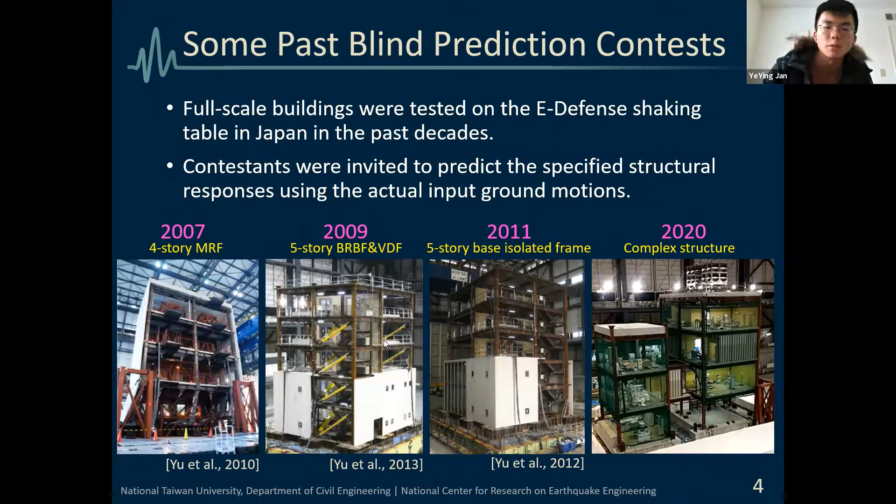The team from NCREE and NTU has participated in the contest several times. In 2007, we got first place in the 3D category using OpenSees, and second place in the 2D category using PISA3D. PISA3D is the Platform of Inelastic Structural Analysis for 3D systems, which is developed by NTU and NCREE. In 2009 and 2011, we also got great results using OpenSees and PISA3D. Then last year, we got first place in structure response using OpenSees.

Let me first introduce our team members, but Professor Tsai has introduced them already. I'm Ye-Ying Jan, a graduate research assistant, and Dr. Keh-Chyuan Tsai, professor in NTU, Mingjie Zhuang, researcher in NCREE, and Dr. Ruiliang Lin, research fellow in NCREE.

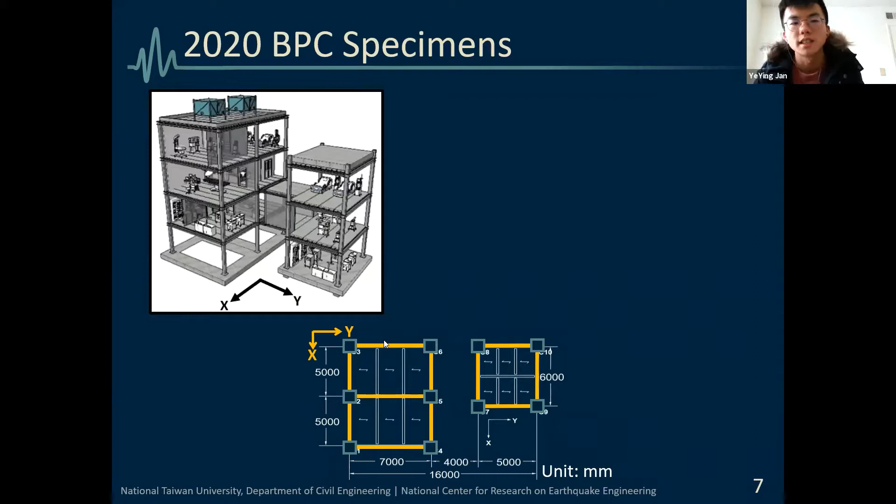Okay, let's see the specimen in the 2020 BPC. The specimen consists of two buildings. One is the fixed base building, and the other one is the base isolated building. Below is the floor plan of the specimen. The XY direction is defined like this, not like the normal one, and is defined according to the contest regulation.

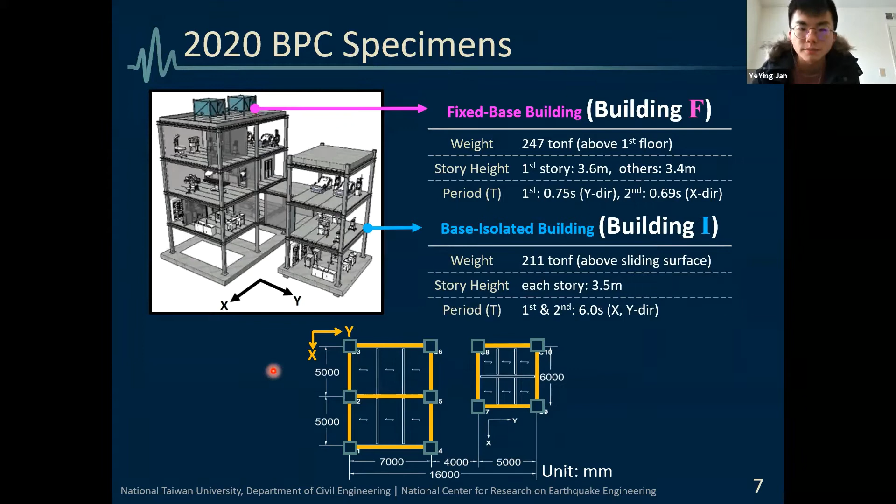Okay, there are three categories in the contest. One is the structural response prediction. There are 5 items for the fixed base building, including floor acceleration, story drift, beam end rotation, column base rotation, and the relative displacement of the expansion joint. And 2 items in the isolated building: one is floor acceleration, and the other is displacement of the isolator.

The other category is non-structural response, including piping, tank, and the light. And the third category is still non-structural response, but using the structural response after the experiment. In these 3 categories, we participate in the structural response, which has the most teams competing.

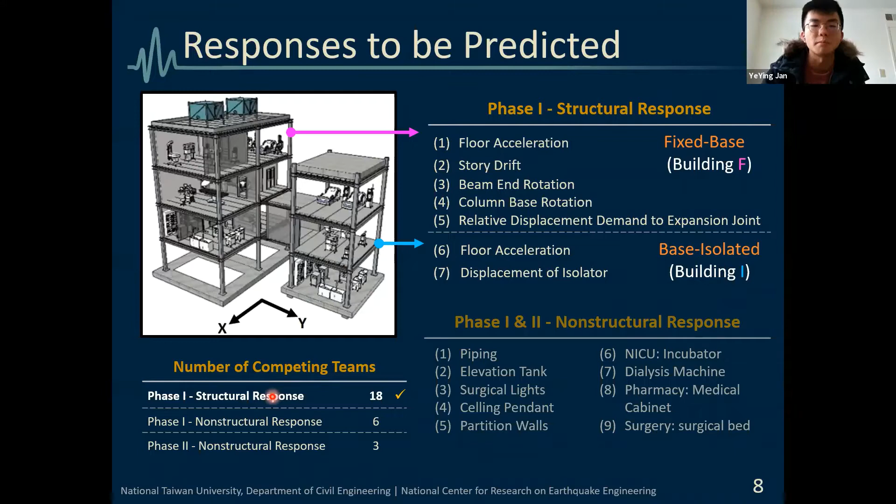In the score counting, there are two parts. One is submission score, and the other is accuracy score. Below is the table of our score, and we got 21 submission score and 20 accuracy score, and got first place in 18 teams.

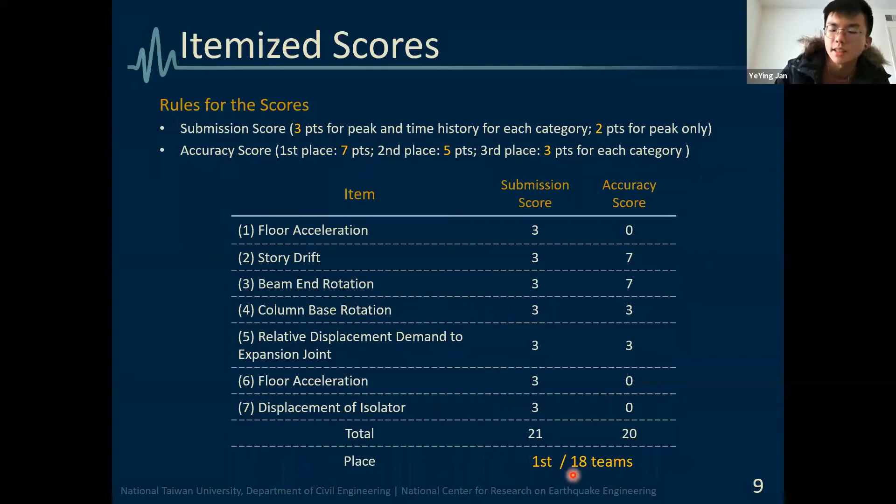Okay, let's see the numerical modeling. This is a summary of numerical modeling. My software for analyzing the model is OpenSees, and the GUI for building the model is GiD plus OpenSees. In the numerical procedure, I adopt Newmark integration with gamma 0.5 and beta 0.25. And P-delta is adopted for geometric transformation. And Newton line search is used for the solver algorithm.

And the integration time step size is 0.005 seconds. And 1% damping is applied for the first and the sixth mode of the fixed base building in computing Rayleigh damping. Then in the numerical model, rigid floor diaphragm is assumed for all floors. And the total dead load for each floor provided by the organizer is adopted. And masses are placed at the column center lines considering the tributary area of the columns. And all line elements in the numerical model are force-based beam-column with 3 integration points.

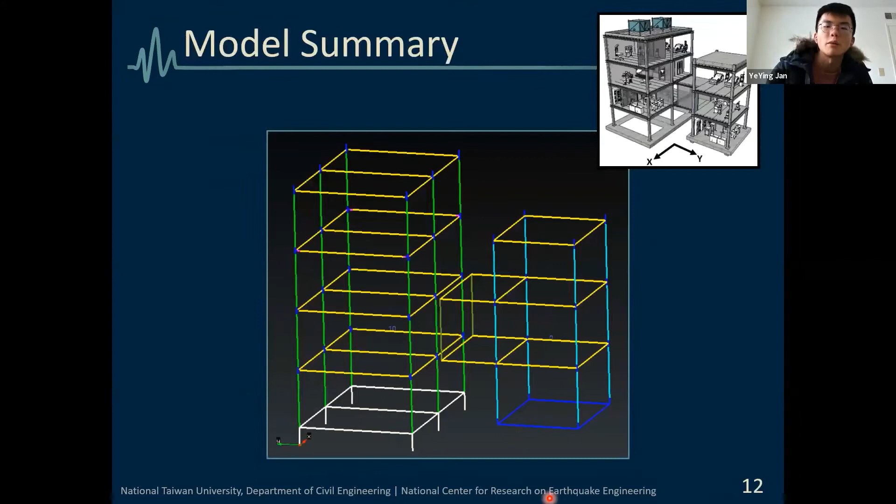Okay. This is the schematic of the numerical model. You can see the blue line in the corner of beam and column. These are the rigid bars to simulate the panel zone. And the pink line in the third floor of the fixed base building is to simulate the exterior diaphragm, which cannot be seen clearly. And the gray lines are the grade beams with elastic section. And the joint between the column and the gray line is the zero length element to simulate the ductile column base, which is special in this contest.

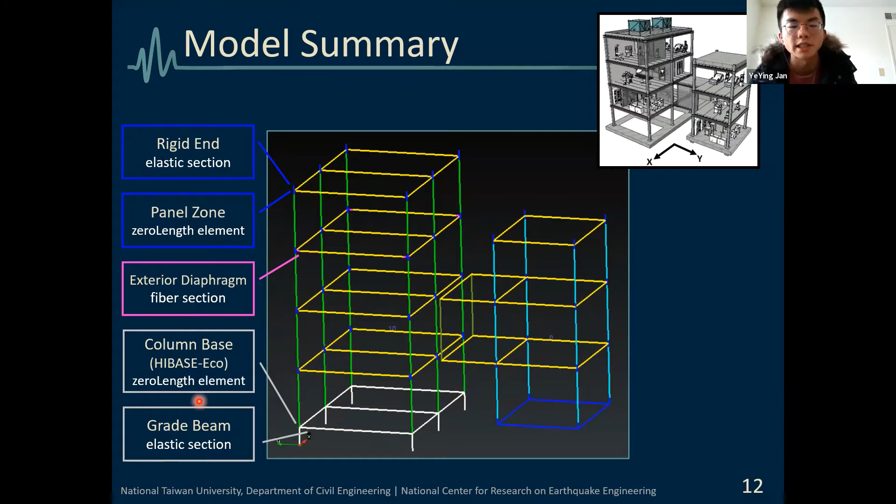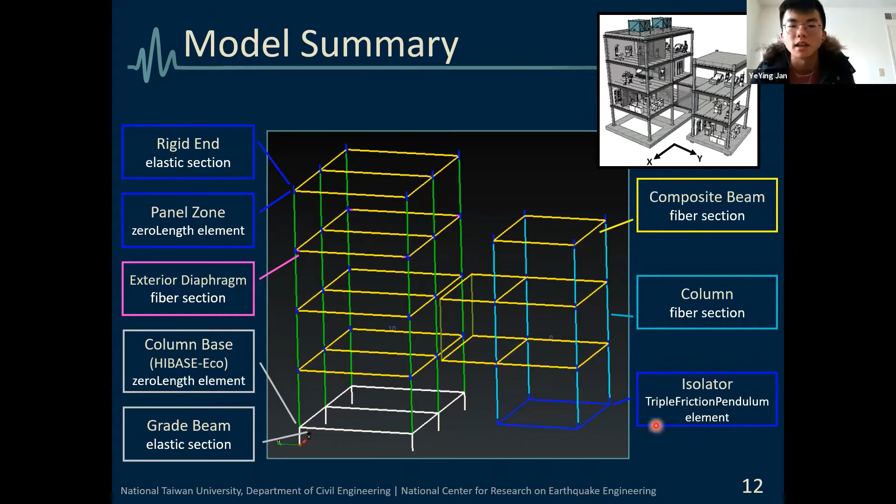Then the yellow line is the composite beam, which uses the fiber section. And the columns also use fiber section. The last is the isolator. I use triple friction pendulum to simulate the isolated building. Okay.

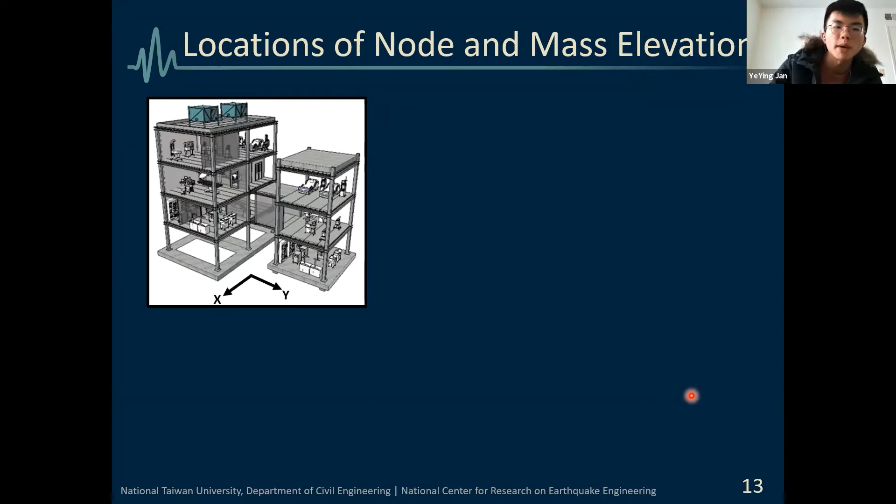This page shows some locations of nodes to notice and the mass elevation in the numerical model. The mass is placed 50 millimeters above the top of the beam as the average height by weight of the concrete floor and the weight of the steel structure. And the column nodes at the top of the beams, the bottom of the beams, and at the column base are to simulate the panel zone.

And at the bottom of the isolator, one node is fixed at 0 millimeters height at the shaking table, and 330 millimeters height and plus 157 height are the lower nodes and the upper nodes of the isolator.

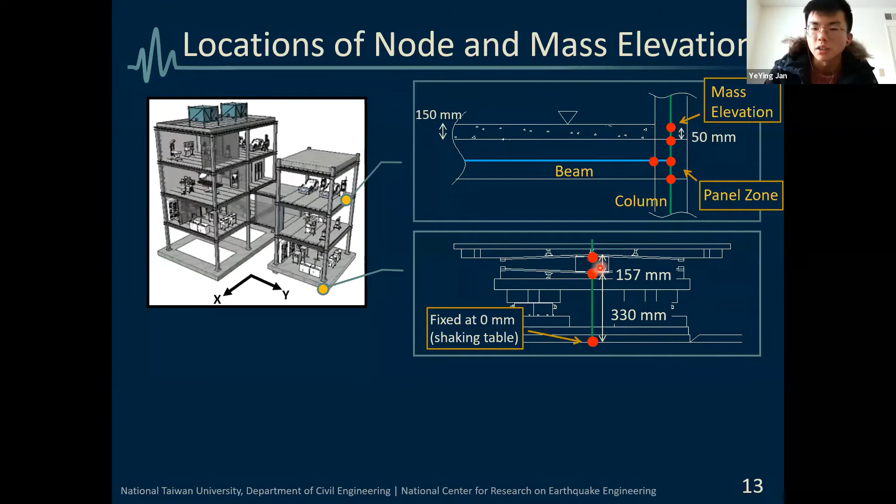Then in the second floor of the fixed base building, the contest organizer placed 2 LVDTs to measure the rotation of the beam. So I also placed a node 1,500 millimeters away from the column base to measure the rotation of the beams. I use the rotation in node I here minus the rotation in node J here to get the rotation of these beams.

Finally, in the column base of the fixed base building, there are nodes at 0 millimeters high, fixed at the shaking table, and at 1,050 millimeters high at the column base, which is 50 millimeters above the first floor because of the cement of the ductile column base. And between these 2 nodes, one node is put in the middle to connect the grade beams.

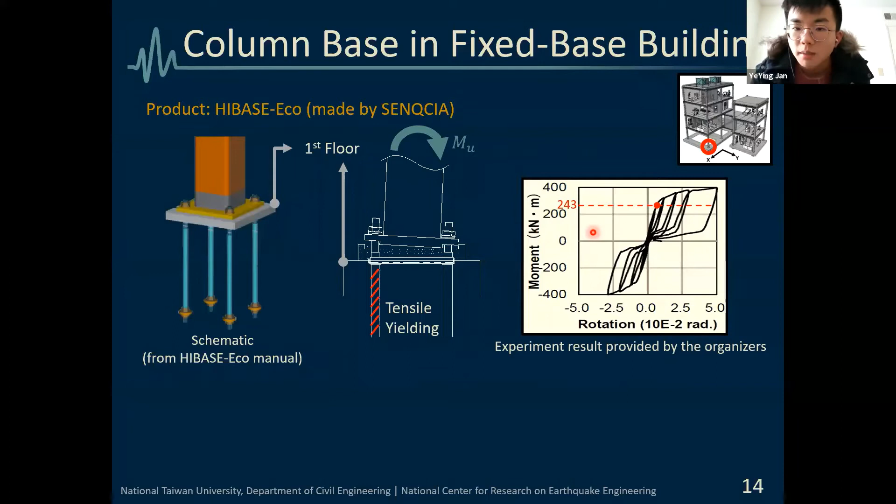Okay, let's see the column base in the fixed base building. This is the HIBASE-Eco made by a company in Japan. When sustaining bending, this ductile column base is designed to make the bolt yield prior to the column base. So the moment rotation diagram of the column base is like this, provided by the organizer. The loading and unloading history will be like this. The bolt will yield prior to the column base.

Then let's see the numerical model. I use a zero length element in the numerical model, and in the Rx and Ry degrees of freedom of the zero length element, I use self-centering material to simulate the ductile behavior. One node, I, is connected to the grade beam, and the other node, J, is connected to the column. Between these two nodes, the zero length element is adopted, and the Rx, Ry, two horizontal rotation degrees of freedom use the self-centering material.

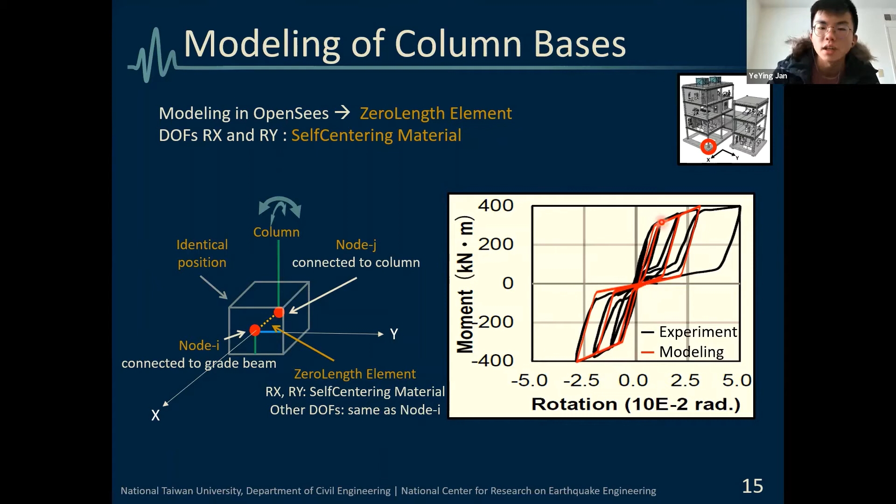Then the simulated results are like this, the red line. These are matched to a certain degree to the experiment data.

Then let's see the panel zone. When the panel zone is sustaining bending moment, the shear deformation occurs like this. So to model the behavior of the panel zone, the nodes are placed at the four edges of the panel zone. Within these nodes, rigid bars are connected within the panel zone.

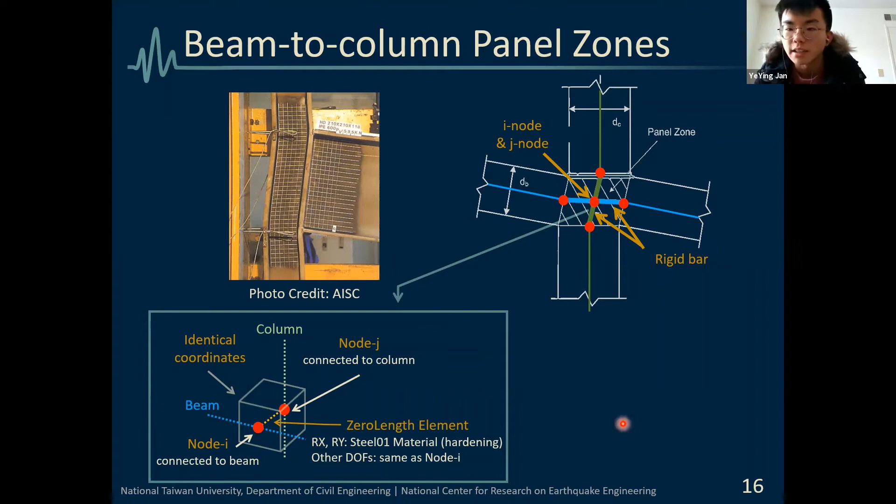And in the center of the panel zone, there are two nodes. Here is the schematic, node I and node J. Node I is connected to the beams, and node J is connected to the column. Between node I and node J, there is a zero length element. And in the Rx and Ry degrees of freedom, Steel01 material with hardening is used to simulate the rotational stiffness and the deformation of the panel zone. And the other 4 degrees of freedom are tied together.

The rotational stiffness of the panel zone and the yielding capacity can be calculated by these formulas in Tsai and Popov, 1990.

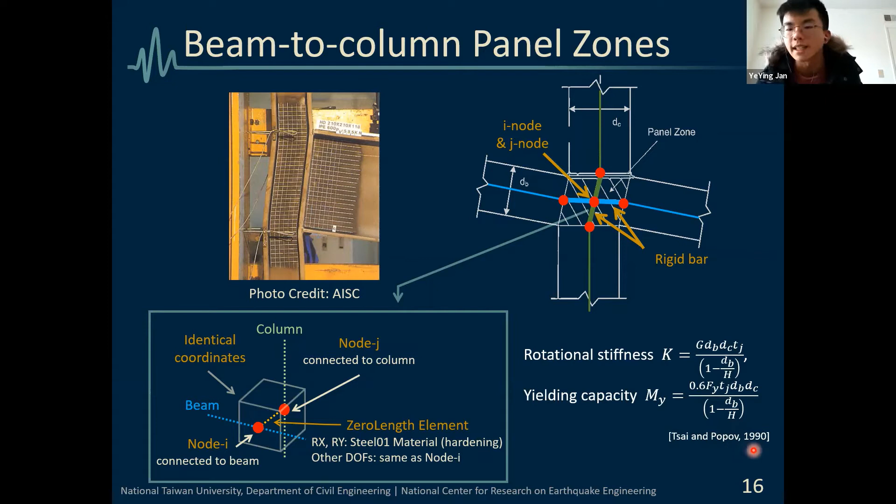Okay, the final part in the numerical modeling is the double concave friction pendulum system. According to the manufacturer, Nippon Steel Engineering, the isolator has 0.013 friction coefficient, the radius of sliding curvature is 4.5 meters, and the period is 6 seconds.

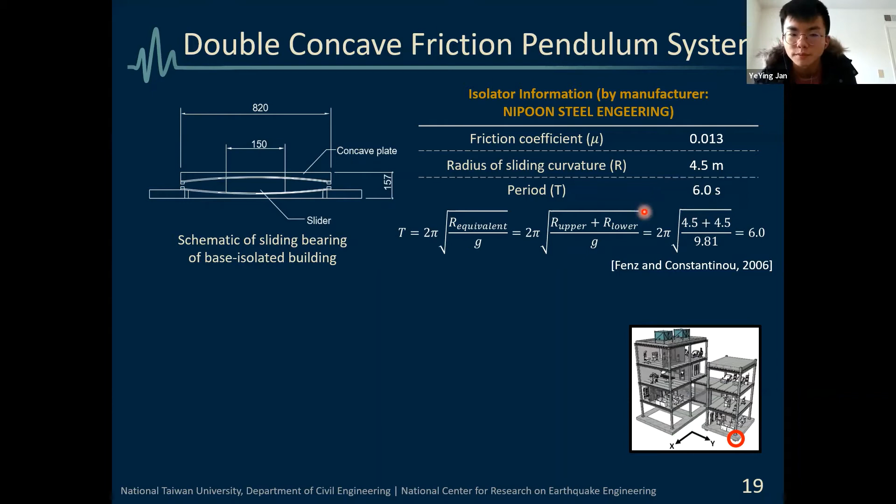Then in OpenSees, there is no certain element for the double concave isolator, so I use triple friction pendulum to simulate. To catch the behavior of the double concave pendulum, the friction of the inner sliding surface, the red line here, is set big enough to prevent the slider from sliding. So I use the Coulomb friction model and set the friction coefficient of the inner sliding surface as 1.0. It is big enough to prevent sliding.

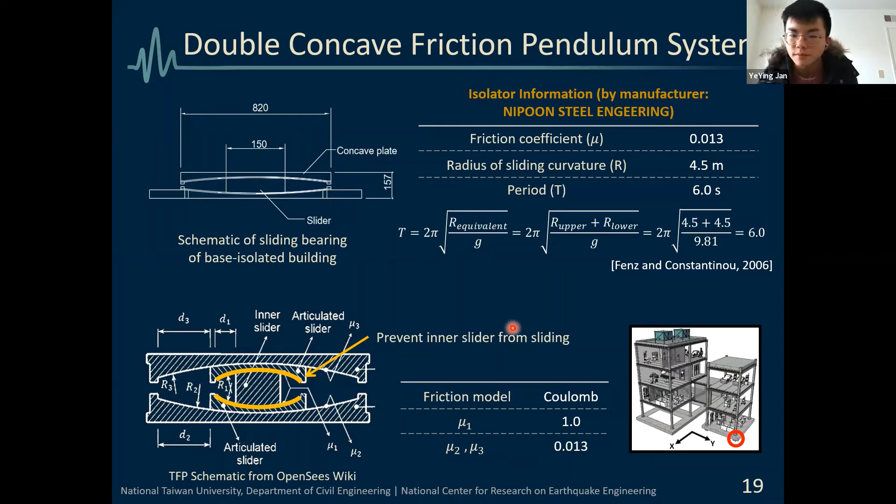And the outer sliding surface is 0.013, as per the manufacturer information. Okay. Let's see the analysis result. The first is modal analysis.

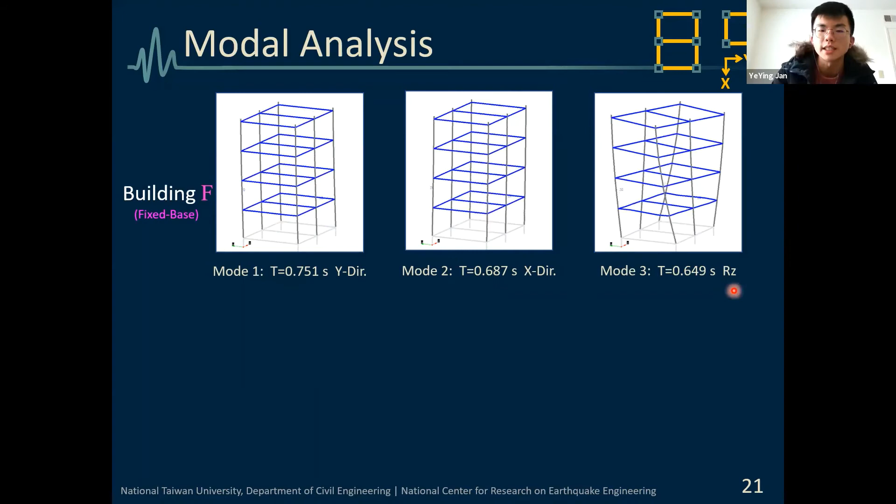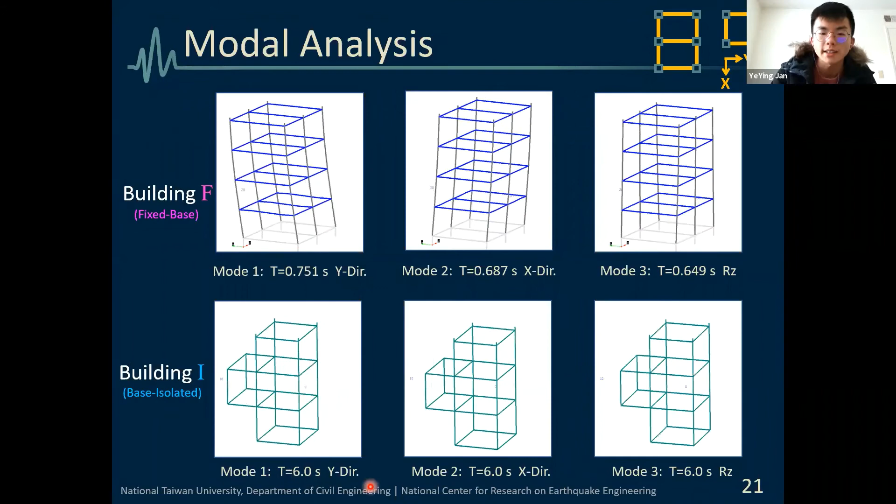The first three modes of building F, the fixed base building, are like this. In y direction, 0.75. In x direction, 0.68. And in rotation z, 0.649. And the first three modes of building I, base isolated, are like this. The first three modes are all 6 seconds in x, y, and rotation z.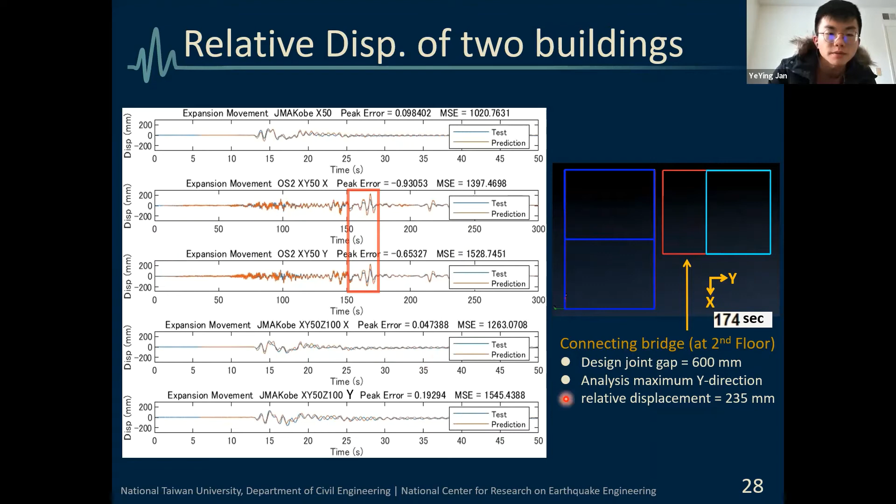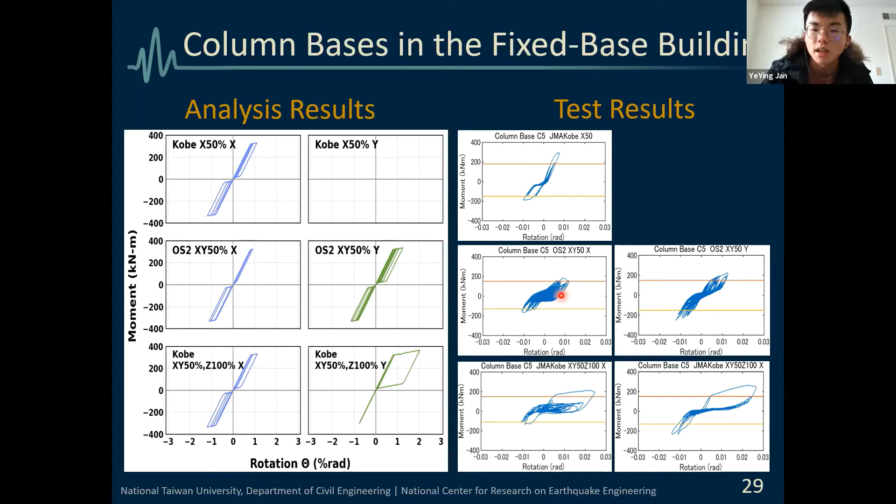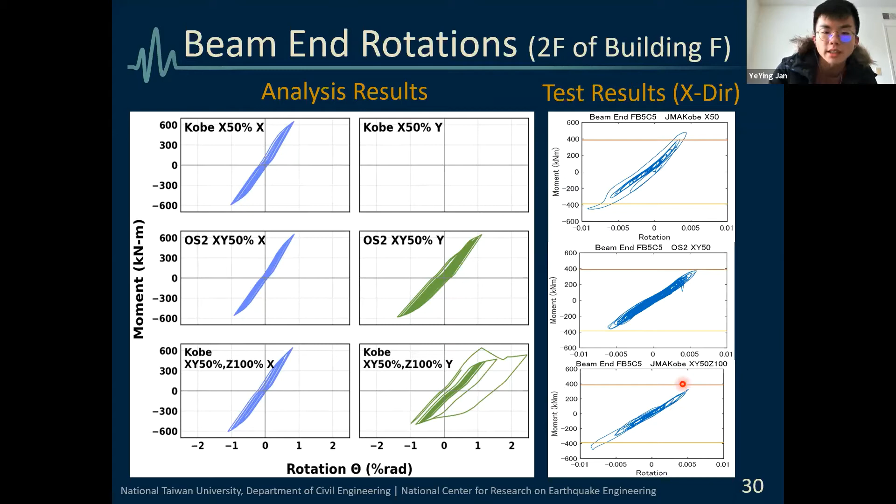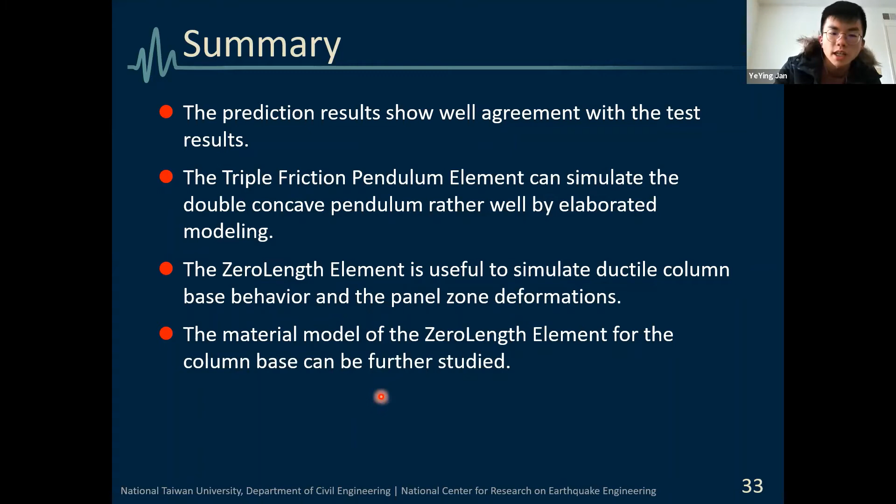And this is all referenced in this PowerPoint. And the OpenSees program developed by Dr. Frank McKenna and other researchers at PEER Center and UC Berkeley is very much appreciated. Part of the present research is supported by the Tokyo Metropolitan Resilience Project of the National Research Institute for Earth Science and Disaster Resilience. The organizers are gratefully appreciated for organizing the blind prediction contest, conducting the test and sharing the test result. And this study is supported by the Ministry of Science and Technology, Taiwan ROC.

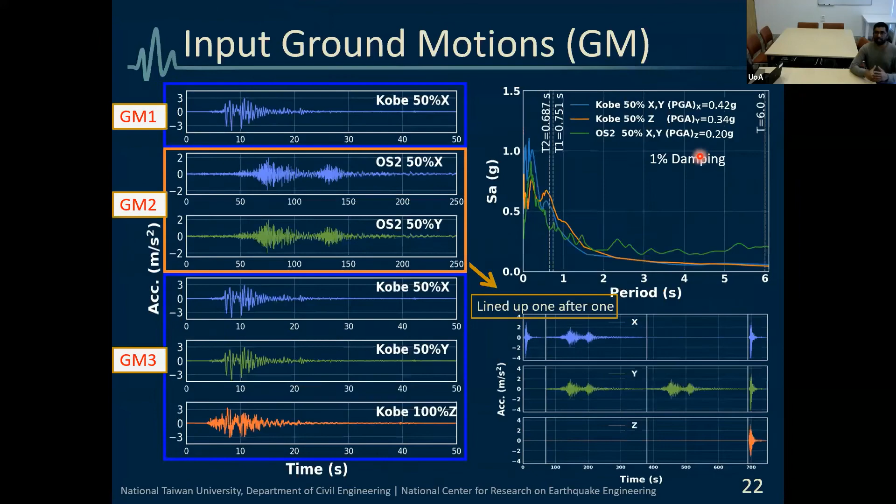So thank you for your presentation and your modeling, and I hope it will help everyone on how to model the finite element connections well. Any questions from anyone in the audience? Please feel free to ask any questions. I mean, I can ask a couple of questions in the meantime.

So one thing is, in your acceleration response spectrum, you use 1% damping. Is there a reason for that? Yes. I don't remember the slide number, sorry. That's no problem. Yes, because we consider the first to sixth modes of the fixed building important in our analysis. And 2% may be too big for the damping, so we use 1% in our numerical model. So we apply 1% damping in the spectrum analysis, same as the 1% damping in our numerical model.

No, my question was, how did you come up with 1%? Because I didn't understand your answer, sorry. Usually for structures, the code recommends like 3%, 4%, 5%, depending on the structure and the connections you're using. So I was curious how you came up with 1%, because in the experiment you have a certain amount of damping, and this 1% Rayleigh damping is in addition to the hysteretic damping, because you're using a lot of elastic sections, elastic members also. So I was thinking 1% was a little low because you're replacing a lot of rigid connections and elastic sections.

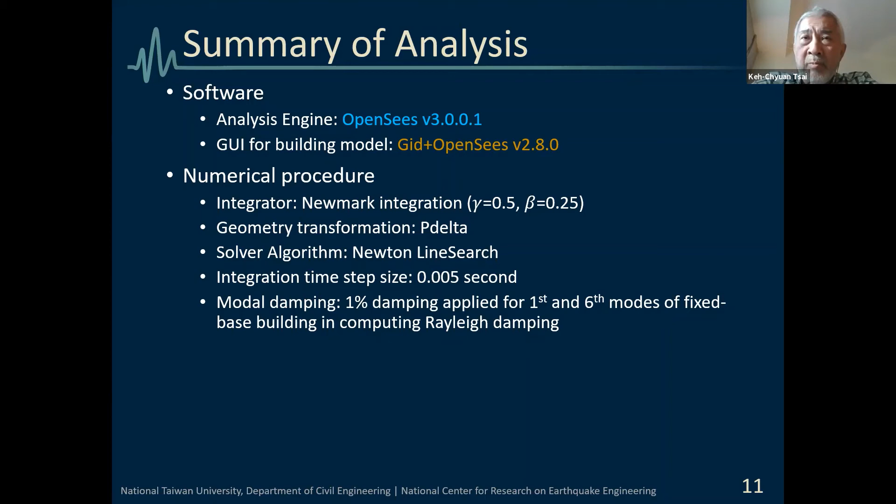And so it could have been higher, say 1.5% or even 2%, applied on the first and sixth modes, and the result could be even improved. I don't know. We will try to see if increasing the damping improves the accuracy or not. So it was somehow arbitrary. Yeah, kind of. And not only this, on the acceleration response spectrum plots there was 1% used also. Yeah, that's just for comparison purposes, because he applied 1% in his structural model, so we figured it's better to show the 1% damped response spectra. Okay.

And also, when you are showing the errors between the experimental and the model, you got very close results for the parameters related to the global response, and high error in the localized parameters. Is there a reason for that? Are you focusing more on the global response because for the blind prediction they are expecting only the global parameters, or are they focusing on local parameters too? I was just curious to know that.

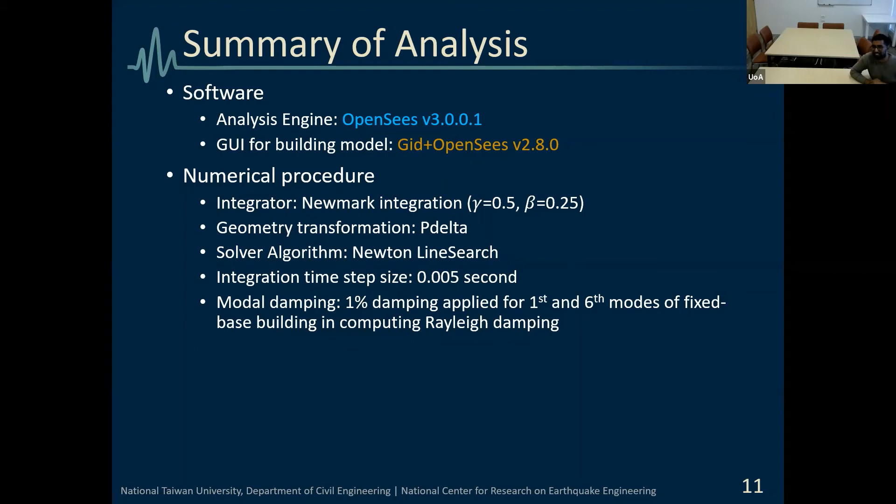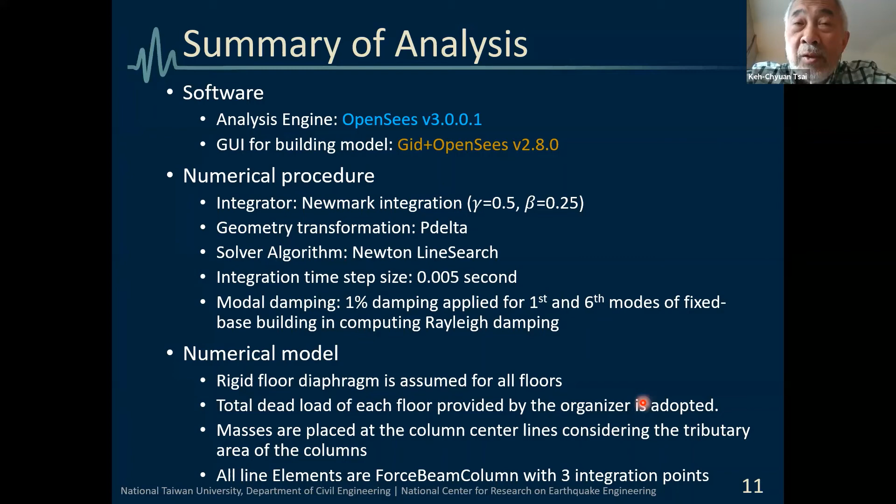I guess it's because if the denominator is small, and then if you have a slightly large numerator, then you will get a large error ratio. So I guess this large error ratio may not mean a very significant error, or it would not have significant impact on the overall response of the structure. For example, when I say overall response, I mean floor displacement or interstory drift, response parameters of that nature.

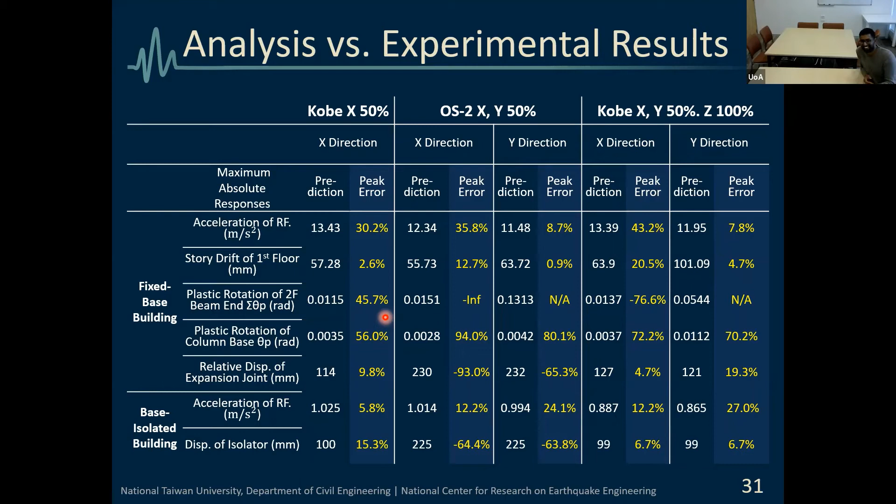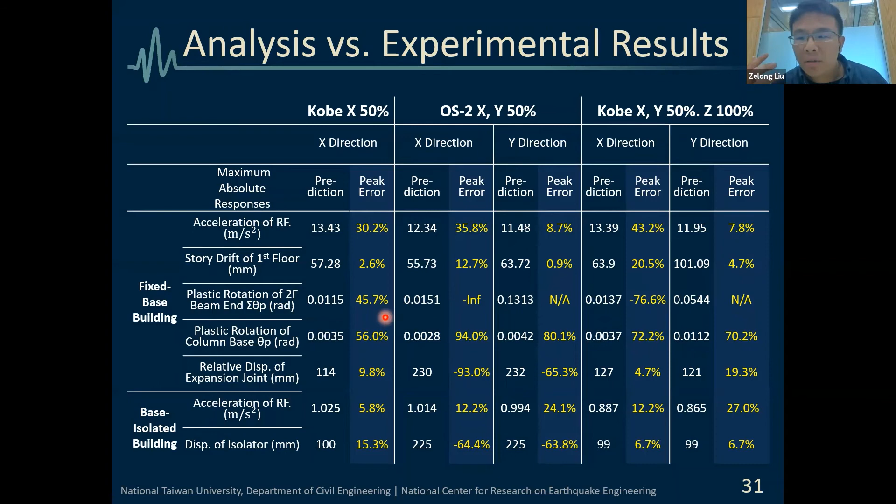Hello, Professor and Ye-Ying. Thank you for the nice presentation. Amazing job. I have a question. In general, when we do our modeling, we have the test result. And for this blind contest, you do not have the test result. As we build the model, the material parameters are sometimes, according to my experience, sensitive to the modeling results, especially the concrete parameter and the steel parameter for the stress and strain values. How can you choose those values for the modeling? Just according to your experience or something else?

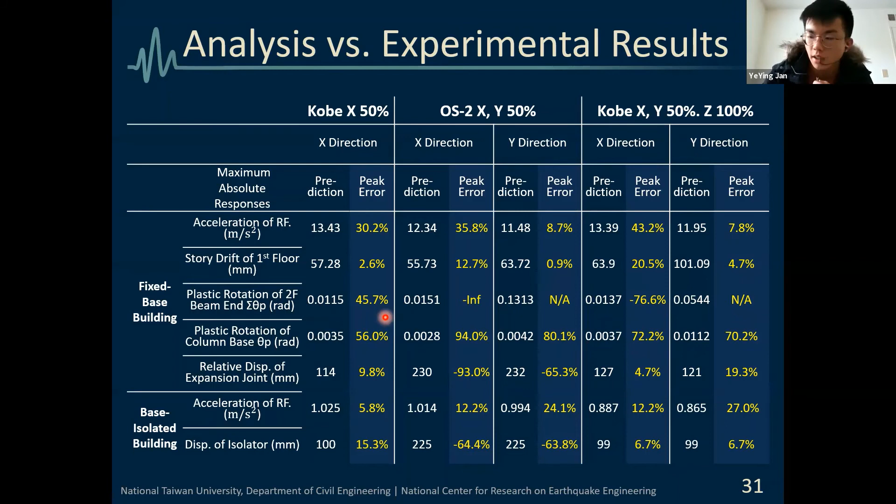Thank you for your question. I can answer this question. Yeah, you may want to go to the table showing all the material. Yeah. For example, this Young's modulus and the strength and the crushing point are determined by the suggestion in the OpenSees wiki, and this Young's modulus is provided by the organizer of the contest for the concrete part. And for the steel beam, there are coupon tests for many beams, like the flange and the web of the beams.

So the Young's moduli used are provided by the organizer. And the 4% hardening ratio is calibrated from the experiment data. And this experiment data is given by the organizer. So we calibrate it to get a 4% hardening ratio.

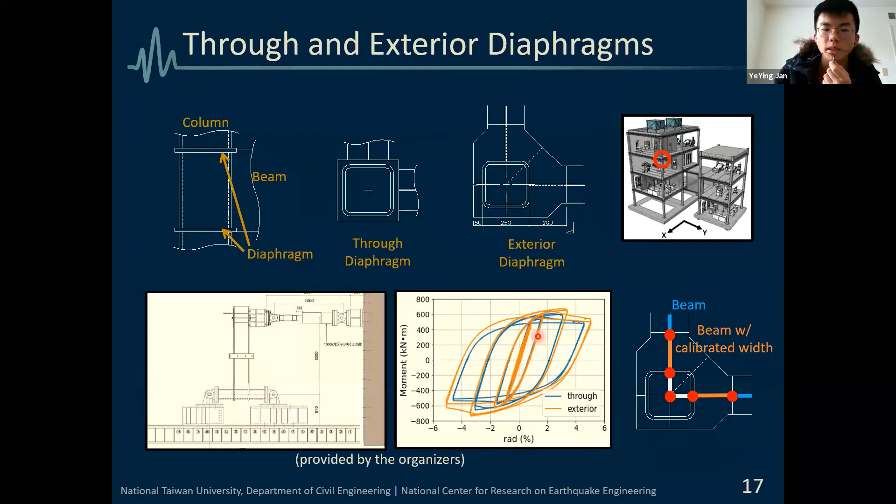Okay, thank you. As those values were provided by the organizer, is the key point for this modeling not about how to choose the material, but about how to model the certain elements of the structure? Is that right? Yes, I think it's more important to choose the element and the numerical setting rather than this material number. Okay, thank you, understood. Thank you very much.

May I add some more comments? Yes, please. Okay, thank you for the question, and thank Ye-Ying for the answer. What we are doing here, of course, is trying to use whatever information is provided by the organizer on the material strength. As pointed out, coupon strength has been used, and the coupon strengths have been provided by the organizers. Ye-Ying has taken the average of the beam web and the beam flange and used the same averaged yield stress for the steel beam.

But I want to say something about the width of the composite beam section of the concrete slab. We have decided to use 300 millimeters to represent the effective width of the concrete slab. But in fact, if you follow various kinds of design code, you would find the effective width of the concrete slab is very much dependent on the span.

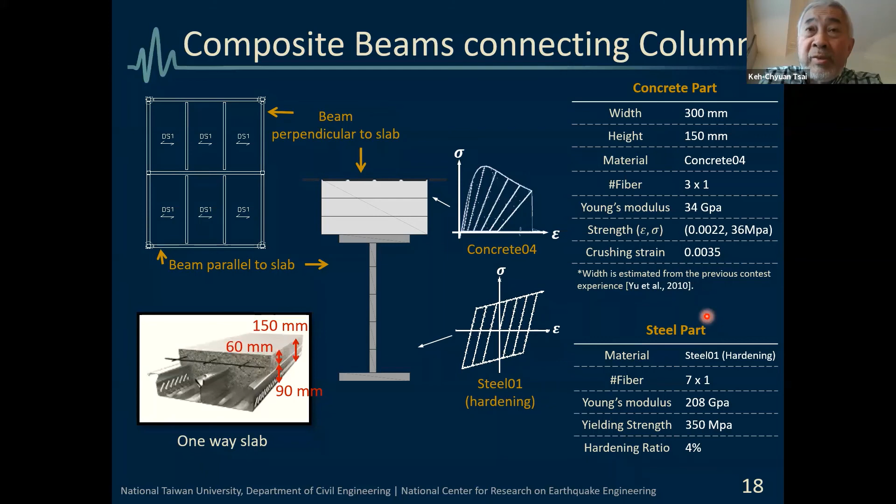Location center. And I may also want to say some words about the location of the center of the mass. So this again is an approximation to try to catch, in the discrete model, where the center of mass may be; the elevation location may be important. So we have decided to try our best to say it's not at the center of the beam, of course, because the concrete slab would have contributed more weight than the steel structure. And so we approximately assume the center of mass is slightly above the top of the steel beam, and slightly below the center of the thickness of the concrete slab.

So the concrete slab is 150 millimeters thick, and the center of mass is assumed to be only 50 millimeter above the steel beam top flange. So again, this is an approximation, and using this discrete simplified model we really don't know where the precise center of mass is.

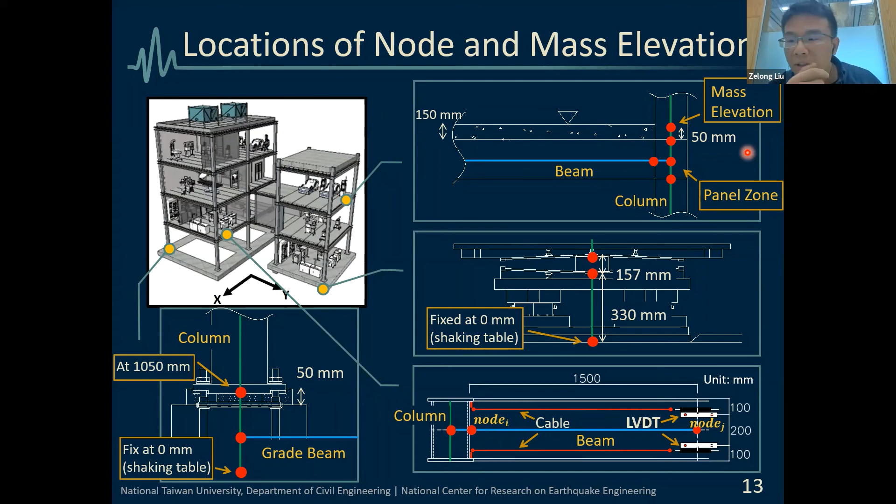Oh, thank you. And another thing is, you told me those beam sizes are according to the previous test. Is the dimension of those specimens the same as the specimen used in this test, or is there any size effect in it? You say which specimen, the beam column, or the beam component or column component used in this shake table test, is the same size as the previous test?

Yes. Similar. I say the column and beam size are similar to the building specimen test in 2007 or 2011. That's beam and column of similar size. Okay, thank you. Thank you very much. Any other questions from anyone else?

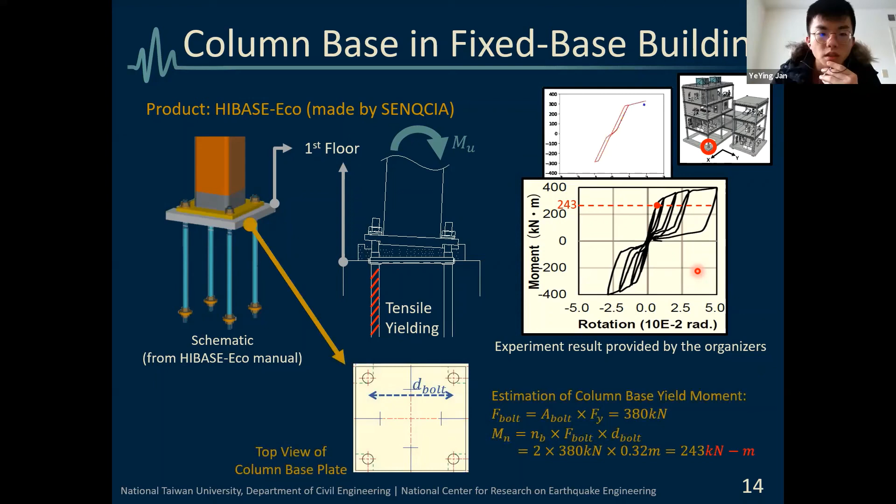Okay, so I have one small question, I'm curious about your experience. Can you go to the next slide, please? Next slide where the building you're showing. Next slide. Yeah. Please. No, next one, sorry. With the building. So I was just curious, I never modeled dynamics of a building

with all the non-structural components, because, for example, we have chairs. During the earthquake, chairs and all these things move, right? But we cannot model that stuff in OpenSees. I was just curious to know how much of that will affect the response of the structure, being able to model that well. Non-structural, yeah, for example, all the chairs and tables, everything can move in the building. So it's a good amount of mass moving too. So relative, I'm not sure. I was just curious to know from your experience, how much of.

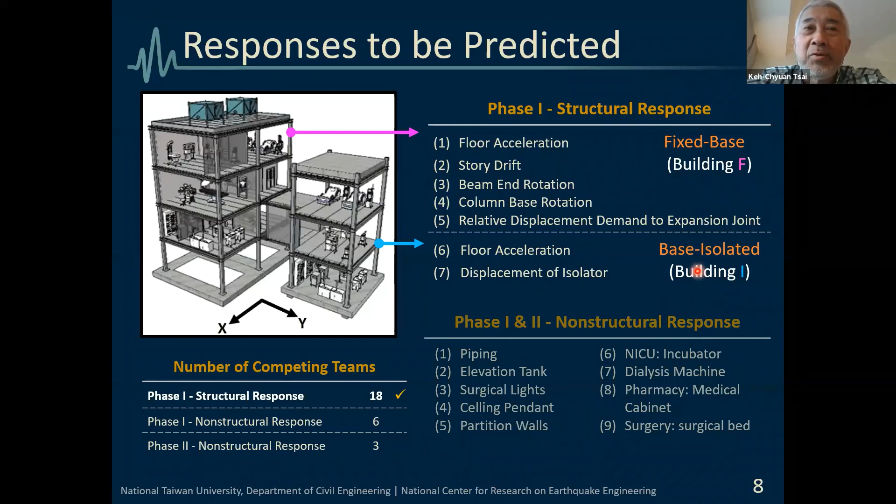Sorry guys, we have a fire. Sorry, I have to leave because of the fire thing. Okay. I think you should leave. Evacuate the building using the nearest fire exit. Okay. Sorry. Okay, it's okay.